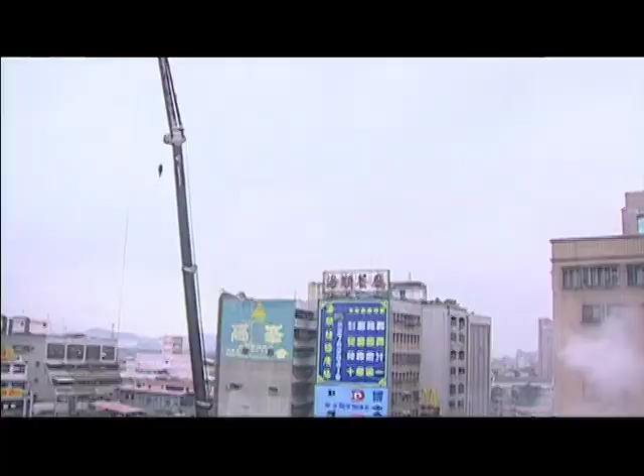Taiwan is under attack. Unpredictable forces of nature threaten the ambitions of this Asian economic giant. To fight back, the island's best minds race to deliver innovative ideas: high-tech factories that manufacture ultra-safe building blocks and assemble them ultra-fast.

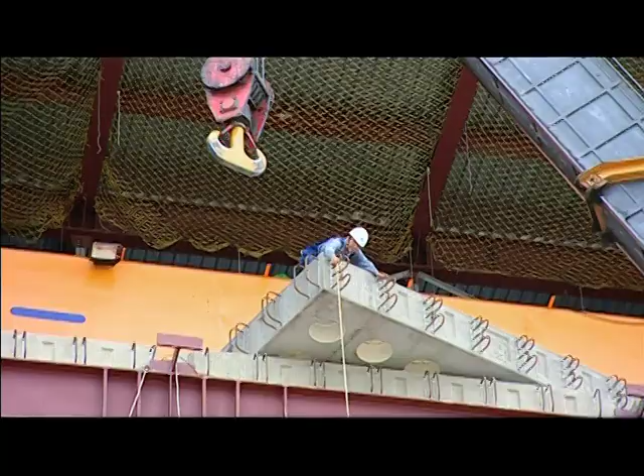Now, Taiwan's unconventional construction method faces its ultimate test: how to prefabricate buildings of all shapes and sizes - a billion-dollar high-tech factory, a 22,000-seat stadium, and a towering 38-story residential block. Tempestuous weather, near impossible deadlines, and the constant threat of earthquakes combine to make the engineer's job even tougher. This is like Lego, but it's a million times harder and bigger. If they succeed, Taiwan's prefab magic will become a man-made marvel.

Taiwan, a mountainous island more than 30,000 square kilometers in size, is home to 23 million people. Rapid industrialization in the late 20th century transformed it into an Asian economic giant. Its foreign reserves are now among the world's largest. But Taiwan's growing economy is vulnerable.

The island is continually attacked by one of nature's most destructive forces: earthquakes. We have about 200 earthquakes of magnitude 5 every year. And then perhaps we have earthquakes of magnitude 6 about every 3 or 4 years.

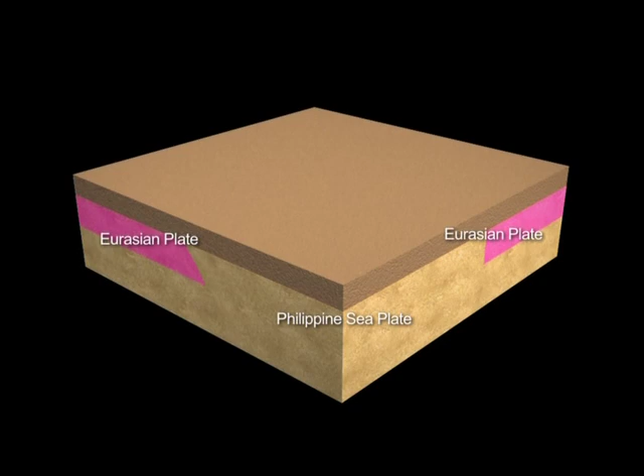Taiwan's geological instability is due to its position on the Earth's crust. It sits precariously on the fault line between the Eurasian and the Philippine Sea plates. Constant movement between these two creates powerful shock waves, producing the many earthquakes experienced by Taiwan, dangerously exposing its densely populated cities to potential devastation.

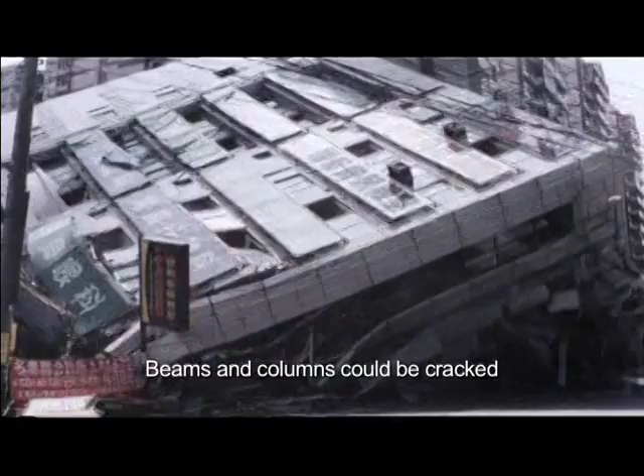Many buildings may not be sufficiently strong enough to resist the earthquake force. Beams and columns could be cracked, and even more seriously, buildings could collapse, causing loss of lives.

September 21st, 1999: Taiwan's worst nightmare came true. A massive earthquake, more than 7 on the Richter scale, strikes the small town of Chi-Chi. It's so powerful that it even rocks Taipei. In the end, more than 2,000 people lose their lives. The disaster, named the Chi-Chi earthquake, cost Taiwan around $9 billion in infrastructure damage.

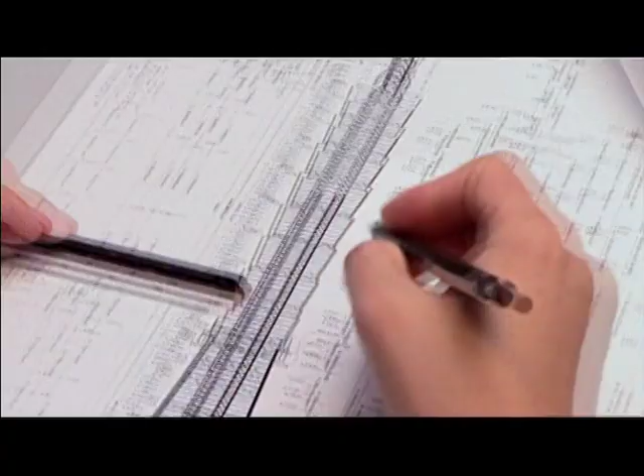Coming up with stronger building methods is now Taiwan's immediate priority. Government agencies and universities begin exploring innovative ideas to strengthen Taiwan's buildings. Multi-million-dollar city icons like Taipei 101 spare no expense to arm themselves with state-of-the-art anti-earthquake devices.

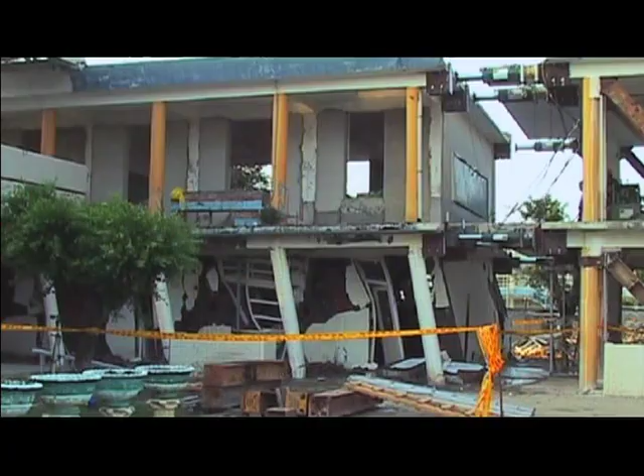Dr. Yin is quick to identify the source of a building's vulnerability when facing an earthquake: it's columns and beams. An earthquake attacks them with its powerful lateral movements, violently bending their steel skeletons and causing the concrete bodies to shatter inside and out. As soon as they collapse, the building they hold up is as good as finished.

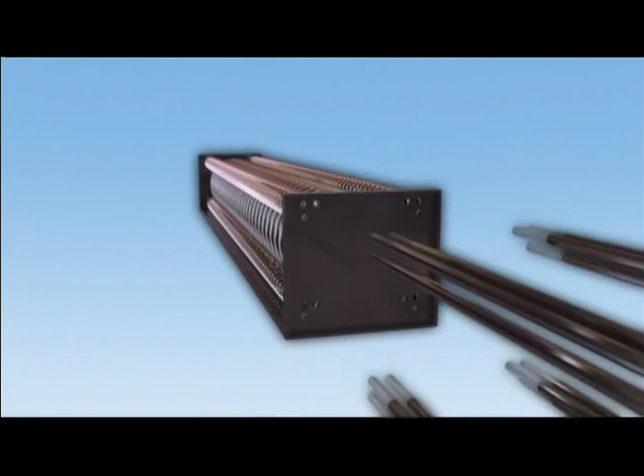Dr. Yin's solution is to replace the squarish shape of a standard beam or column steel skeleton with a unique circular design. He calls it the Yin spiral. The Yin spiral is twice as stiff to keep its shape during the fiercest quakes. It can also dissipate energy more evenly to keep the concrete around it intact, preventing the building it supports from collapsing.

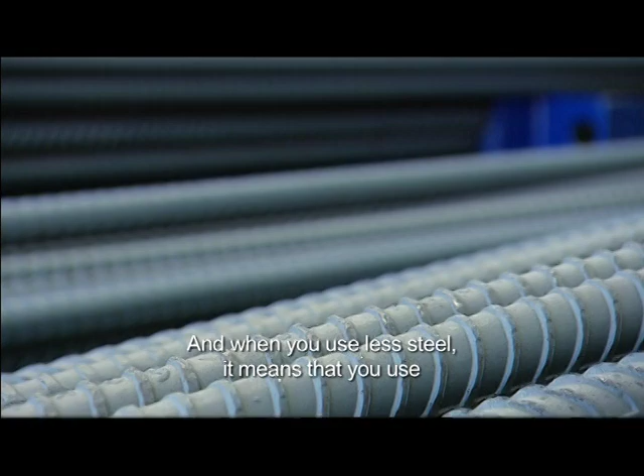But turning Dr. Yin's unique design into a reality is easier said than done. Construction normally takes place on-site, exposed to erratic weather conditions, and prone to human error.

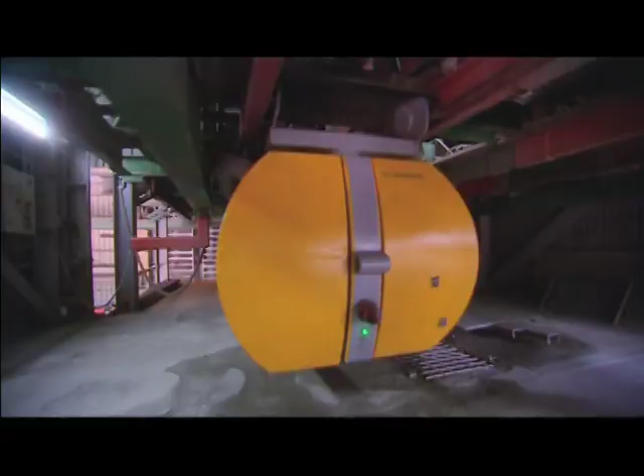Dr. Yin turns to the magic of prefabrication, or prefab construction, for a faster and more accurate alternative. Unlike traditional construction, prefab takes place indoors where the climate is controlled, making the work super fast and hyper efficient. The finished building blocks are then assembled rapidly on location. It's like putting together a mega Lego set on steroids.

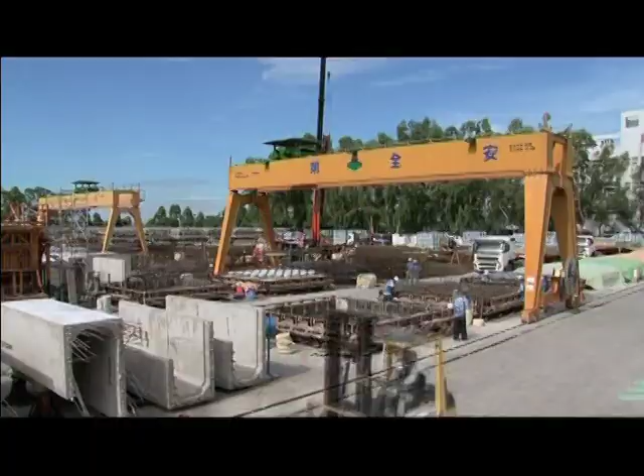Convinced he's found the perfect method, Dr. Yin builds Taiwan's largest and most advanced prefab plant - 10 soccer fields in size, so efficient it can churn out 100,000 cubic meters of concrete blocks in a single year.

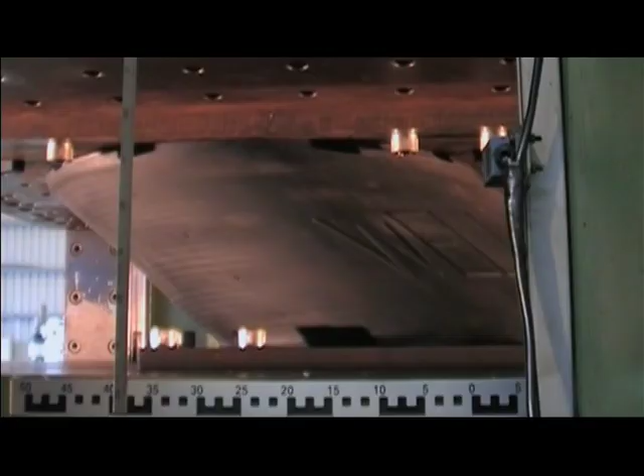The plant's biggest challenge: to customize their prefab process for buildings of totally different shapes and sizes - a billion-dollar high-tech factory, a 22,000-seat stadium, and a towering 38-story luxury residential block. Tough deadlines, the unforgiving Taiwanese terrain, and the threat of typhoons will take engineers to breaking point. Will success seal their reputation as Taiwan's genius builder?

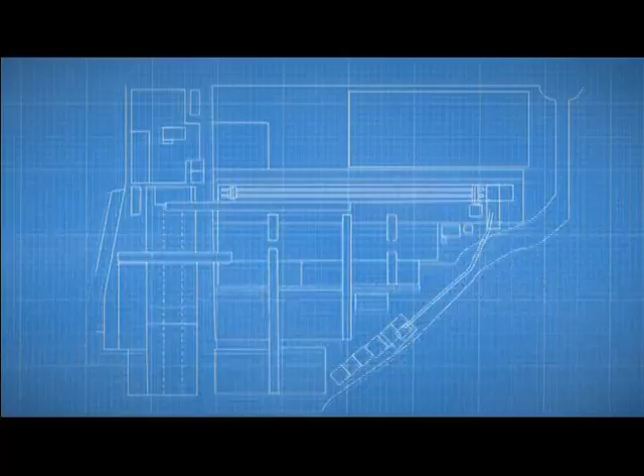The secret to this factory lies in its finely tuned 3-stage process: the steel shop, where high-grade steel is cut and bent into shape; the assembly line, where the steel skeletons of prefab building blocks are put together; and a concrete casting and molding facility, where the mega building blocks get their final shape, ready for delivery. Operational efficiency is crucial.

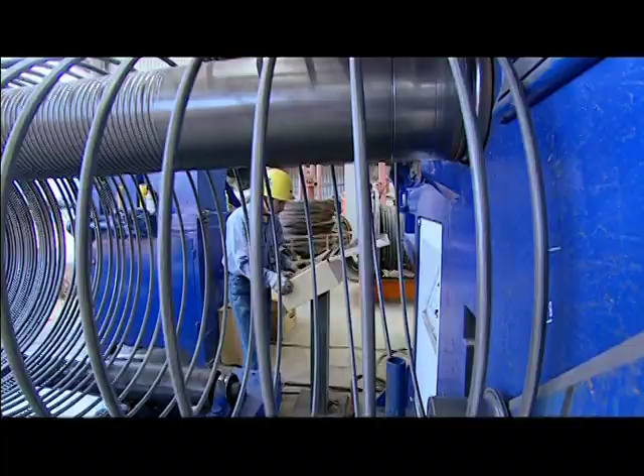It's the ingenious machines that give production an edge. Giant spring manufacturing equipment churns out unique steel spirals that form the skeleton of columns and beams, an eco-friendly process that reduces the demand for raw steel by 30%.

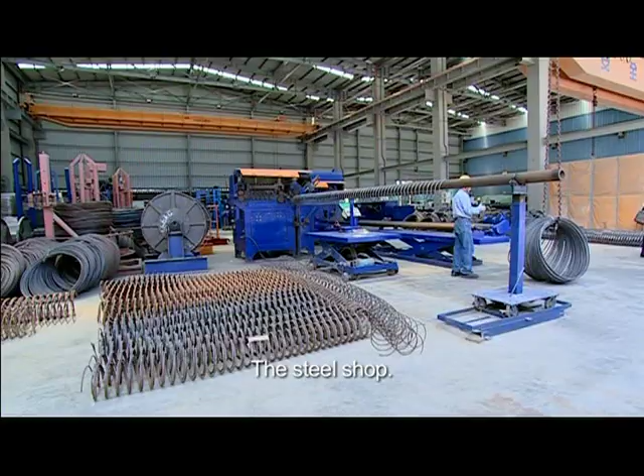The factory is geared up for the challenge ahead. Time now to turn theory into practice. Are they up to the task, to prefab 3 massive buildings of different sizes and shapes in record time?

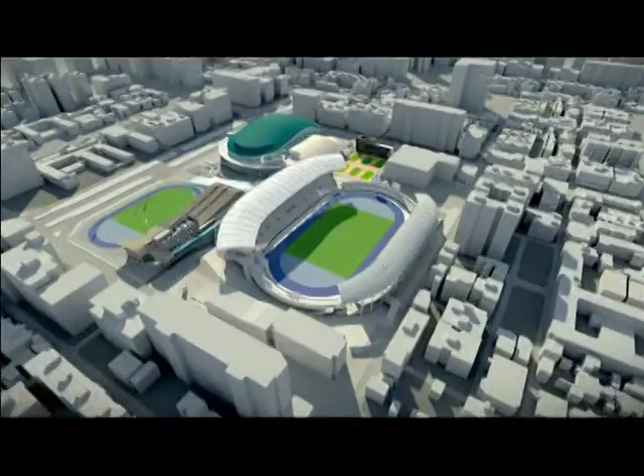The Taipei Stadium, the 38-story Ocean Blue condominium, and the largest of all, the 600,000 square meter Innolux plant.

Innolux is a homegrown liquid crystal display manufacturer in Taiwan's rapidly growing IT industry. The billion-dollar business is one of Taiwan's most important exports. For companies like Innolux to stay competitive, they require high-tech factories to assemble their sophisticated products. The faster they get their factory built, the earlier they can generate income.

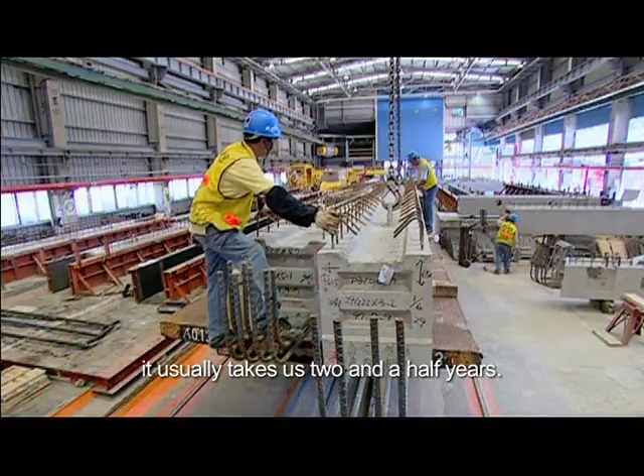In the conventional way, if we want to build such a big project, we usually take 2.5 years. Now we only take 1 year.

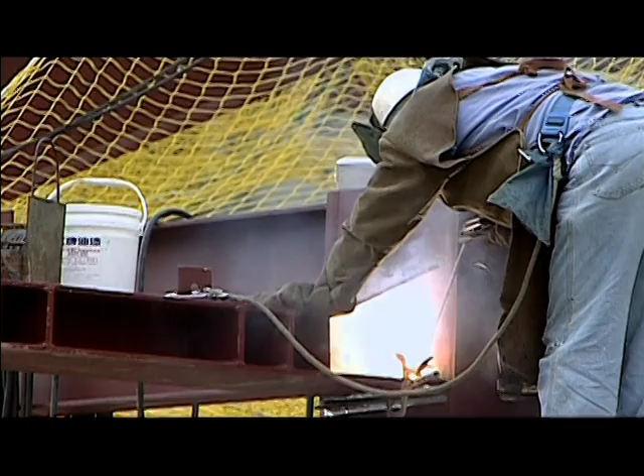Work starts on the plant's massive foundation. Engineers excavate a gigantic area measuring 100,000 square meters. Thousands of tons of steel piles are welded together to form the building's 6-story framework.

But these are the easy parts. The biggest challenge is to tailor-make the floors of the plant's largest cleanroom facility. Cleanrooms are the most important part of the factory. They prevent environmental pollutants like dust or microbes from ruining the microchips that Innolux manufactures.

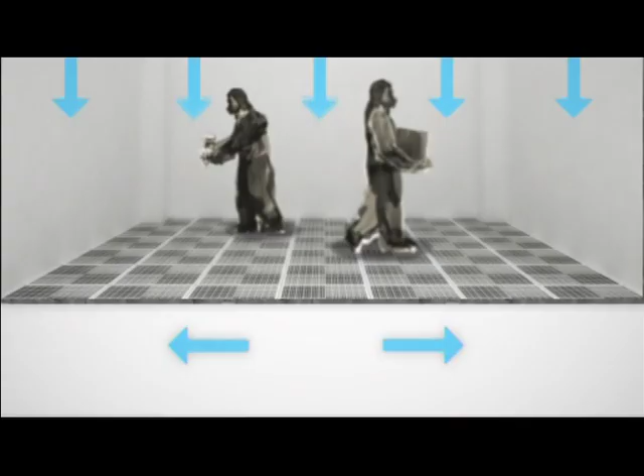Inside, a filtering system controls air contamination levels through multiple ventilation points built into the floor. This means that cleanroom floors are riddled with large holes. So how do you construct a giant floor filled with hundreds of holes while making it earthquake-proof?

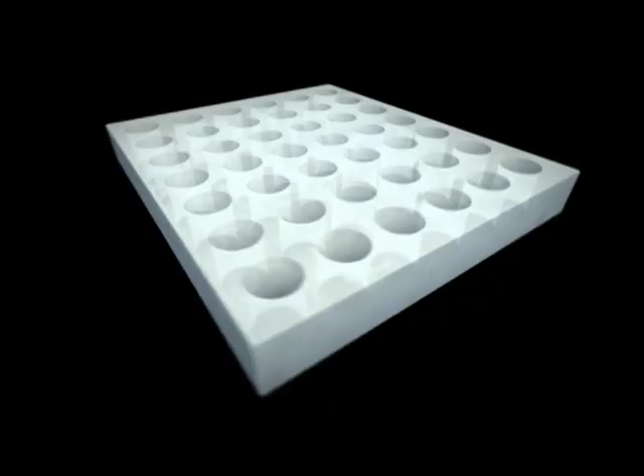The engineer's plan is to split the cleanroom's 48,000 square meters of flooring into 1,800 smaller sections, making them easier to prefabricate. Then, to strengthen each piece, they will double the amount of steel and concrete.

At the same time, a massive net of steel will form the frame of the floor, holding the pieces together. In this way, the customized floor is strong and stable enough to withstand the most violent quakes.

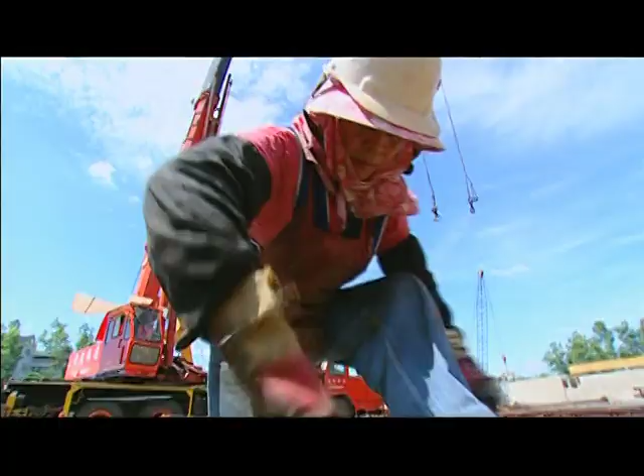With the perfect plan in place, the prefab factory now needs to build the perfect floor. First, a crack force of craftsmen binds the steel skeleton of each floor slab together. The work is fast-paced and done entirely by hand.

Then we have the skeleton put inside of the mold. Here is the mold - you can see it has all these grooves, and then all the skeleton of our concrete slab will be fixed into the right location.

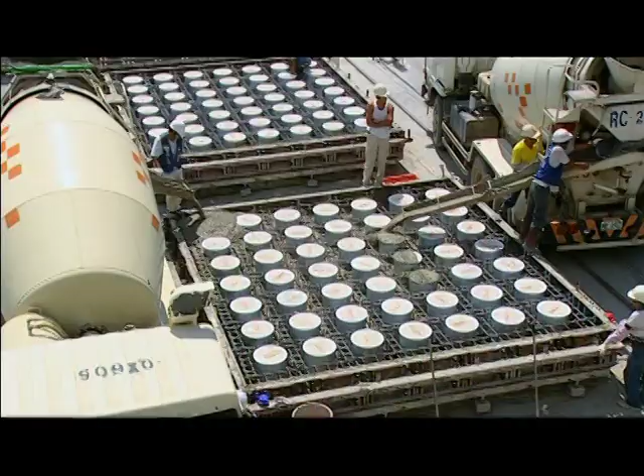After the skeleton is inside, we put the bucket inside here, and then we cast the concrete. As the concrete is poured into the mold, the plastic buckets help to form the shape of the vital ventilation holes. With just 22 molds, the factory is able to prefab all 1,800 floor pieces in less than 3 months.

Because we have to insert all these tubes to get the ventilation, it looks like a cheese, so we call it a cheese slab.

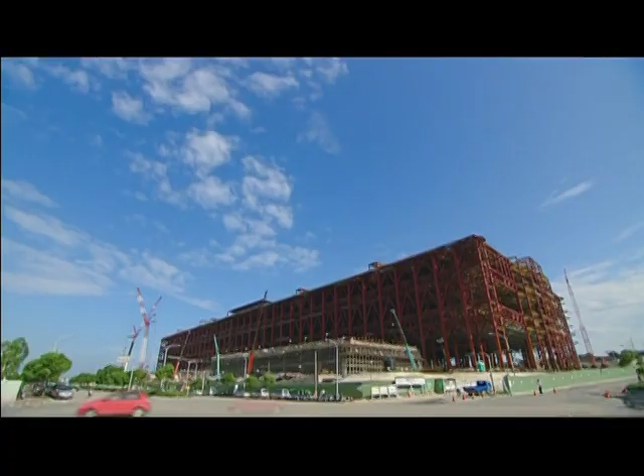The last stage of the process is to install each of the 25-ton floor slabs - not on the ground floor, but 4 stories up. For engineers, it's the most dangerous part of the construction.

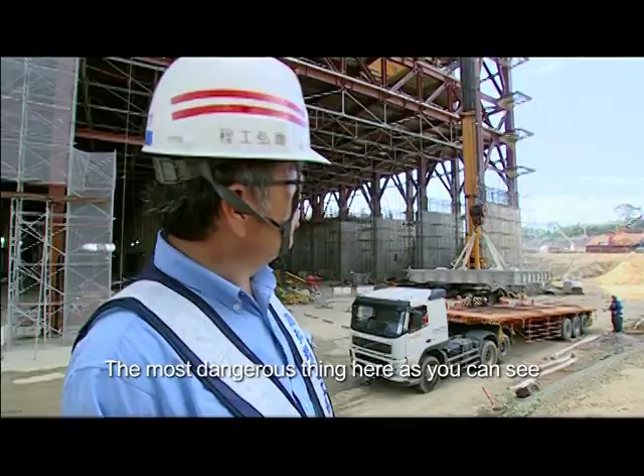The most dangerous thing is, for this 25-ton slab, we have to lift it up to about 30 meters height and insert it into about a 10-meter narrow gap.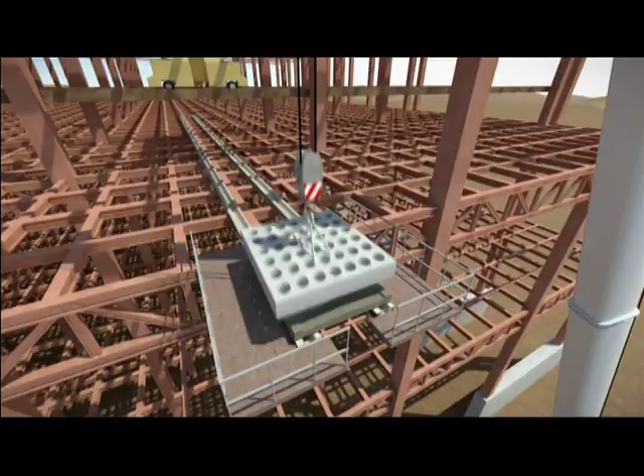For a job like this, you need a heavy lifter - a 120-ton crane capable of hoisting these giant blocks into place. A crew at the top slides and drops the massive sections into the steel framework.

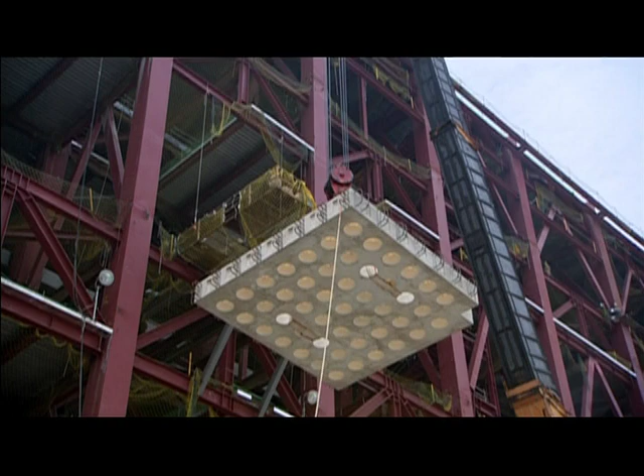You can see, now it's up to the right floor, and we have to get that one into that one. The most dangerous part is inserting the slab. If it doesn't make properly, then we have a big problem. This is a big disaster.

After a harrowing half an hour, and with only inches to spare, the slab rests safely at the top and is moved into position.

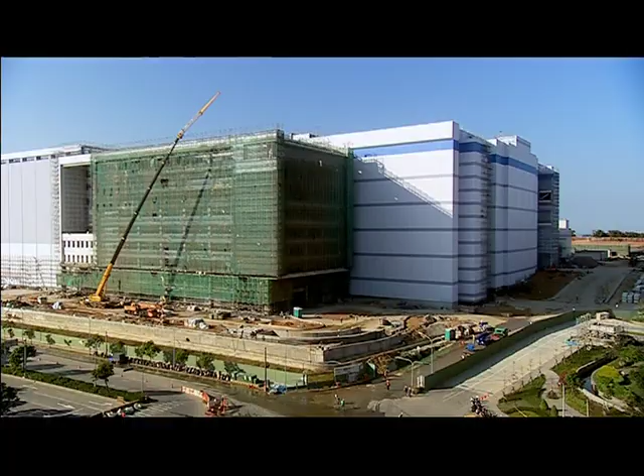Over 10 months, engineers install thousands more floor slabs and put the finishing touches to the factory. Completion of the project is at last a success.

This is an exciting experience for me because we had to finish this big project in such a short time, and the precast helped us to accomplish this mission.

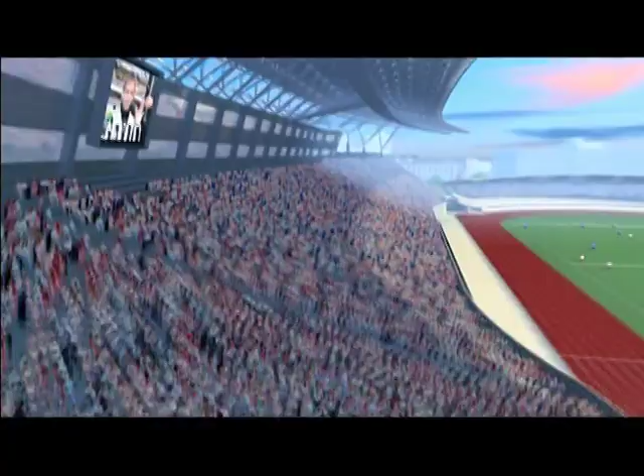With the Innolux plant completed, engineers turn their attention to another mega project, the $70 million Taipei Stadium. It usually takes over 30 months to build a stadium this size. But engineers are going to use prefab to shave more than 5 months off the schedule. If they succeed, it will be the fastest stadium ever built in Taiwan. Only one problem.

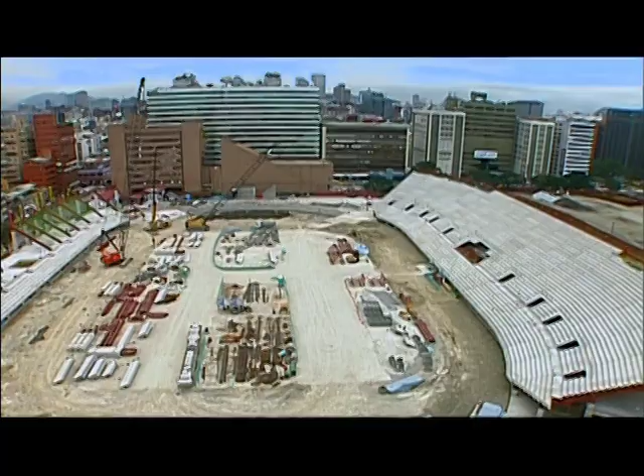The city of Taipei sits on some of the softest soil on the island, a condition made worse by an extremely high water table that rises during the annual typhoon season. If engineers want to get the stadium ready in time, they will have to prevent it from sinking into the ground.

Homegrown innovation has been the powerhouse that's propelled Taiwan into the future.

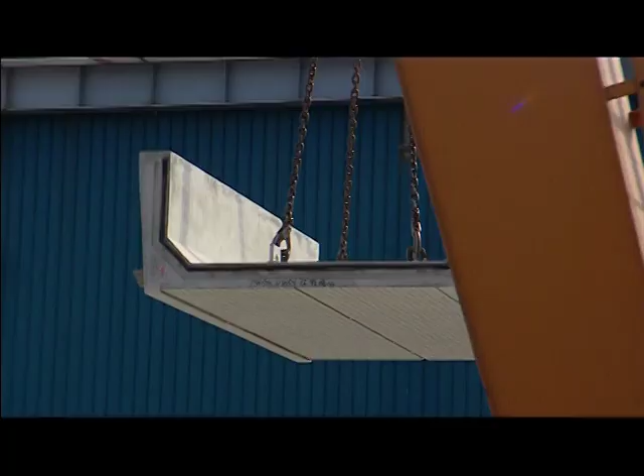The island's largest prefabrication factory is attempting its most ambitious projects to date, constructing 3 mega buildings in record times. Engineers took just 1 year to complete the massive 600,000 square meter Innolux plant. Now they turn their attention to their next 2 missions.

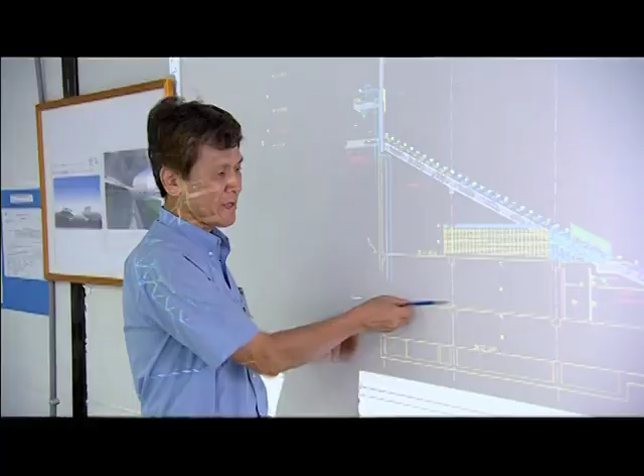The 38-story Ocean Blue condominium and the 22,000-seat Taipei Stadium. Commissioned specially for the 2009 Deaflympics, the stadium has to be ready in less than 25 months. It usually takes more than 30 months to complete something this big. If engineers succeed, they will make construction history.

Engineer Zhang leads the project.

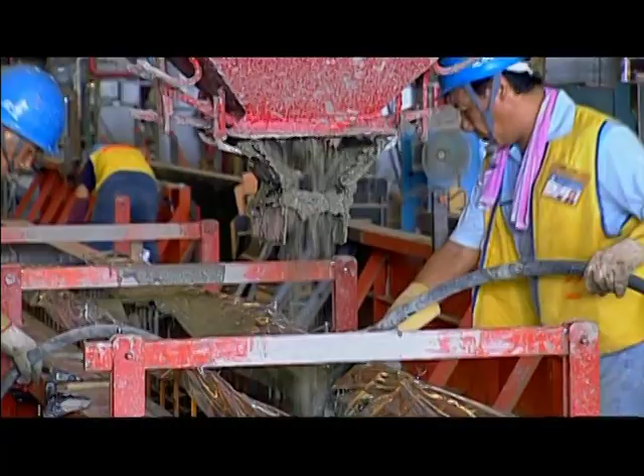Back at the prefab factory, engineers customize the stadium's 900 seating slabs. Specially designed molds of different sizes and shapes churn out the 15-centimeter thick parts. This way, 16 seating slabs can be completed in a single day, a feat conventional methods will find hard to beat.

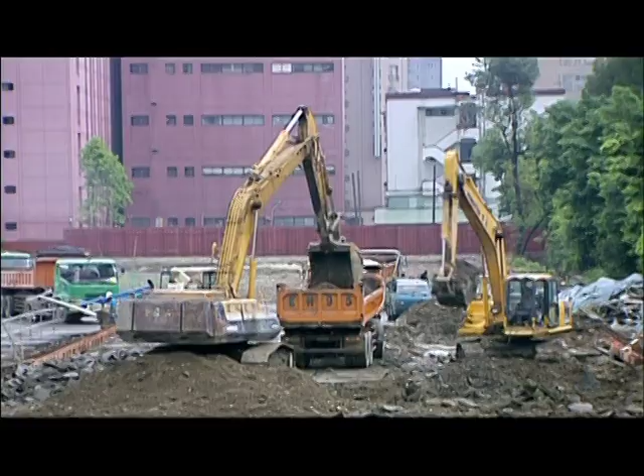But first, engineers have to overcome a sticky problem that could ruin their foundation: soft clay.

This unstable soil underlies Taipei because the city sits on a basin. And as the basin is intersected by 4 rivers, the soil also suffers from a high water table, just 2 meters beneath the surface.

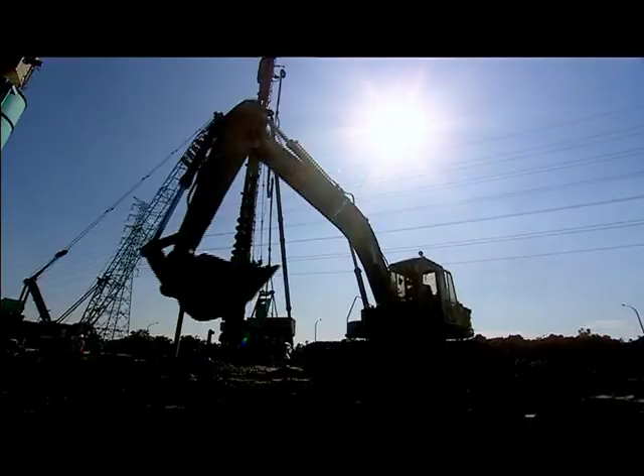Complicating the problem even further is the threat posed by the engineer's deadliest foe: earthquakes.

Because the city of Taipei has a thick layer of soft soil, when an earthquake comes, the earthquake wave will pass through this thick layer of soft soil, and some of the earthquake waves will be amplified. Therefore, the building built on this layer of soil could suffer serious vibrations.

For engineers to complete the stadium in time, they need a solution that will both stabilize their soft foundation and counter the threat of an earthquake.

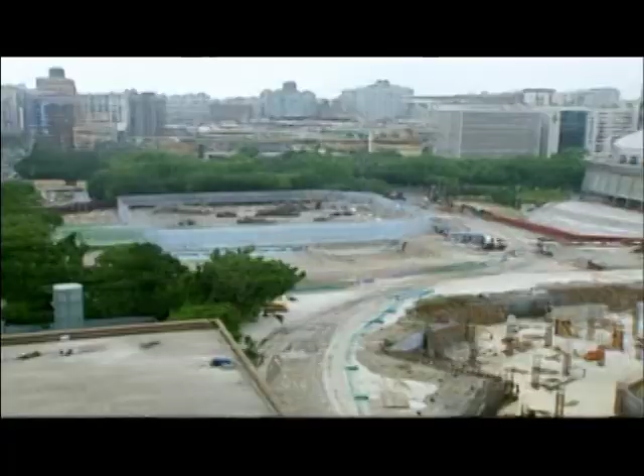Prefabrication can't help engineers in this situation. They need to come up with an alternative solution.

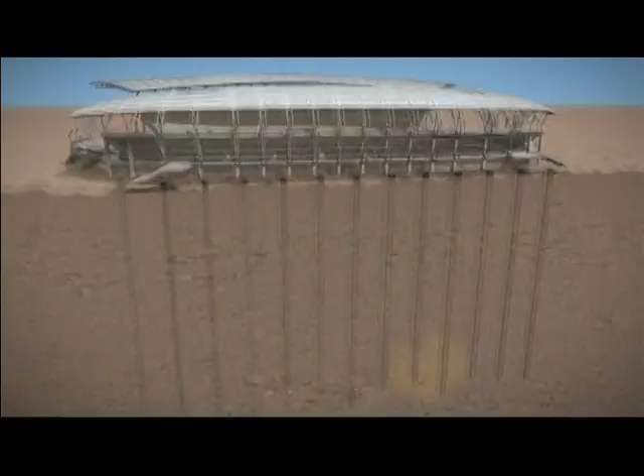One option is to drill steel foundation piles deep into the earth. But it's a time-consuming process, and the amount of steel needed makes it an expensive scheme. What's worse, an earthquake or a hidden pocket of clay could destabilize the steel piles, causing part of the stadium to collapse.

Engineers turn to a conventional but highly effective technique to tackle both problems: mat foundations.

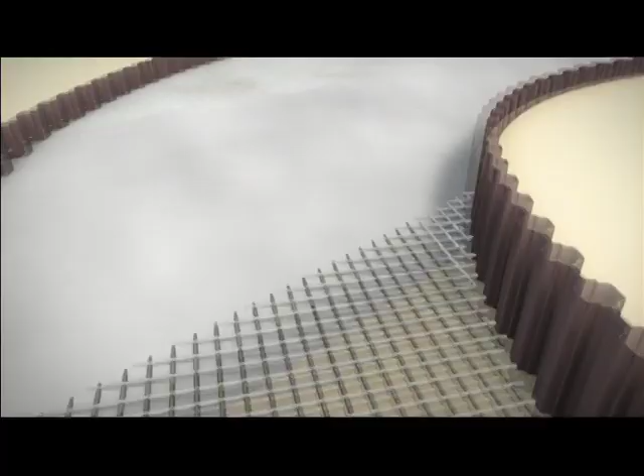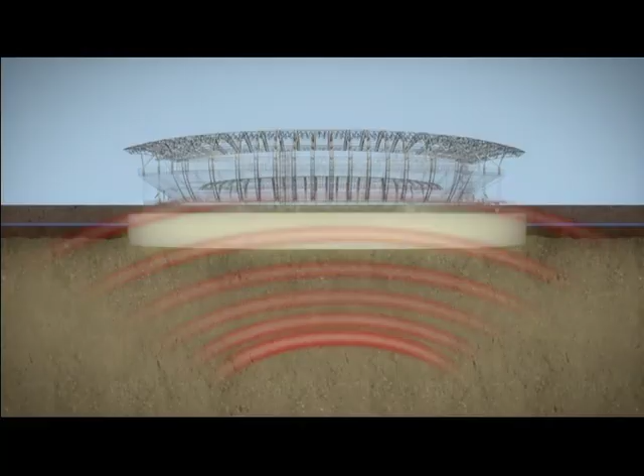Engineers will excavate close to 5 meters down until they hit sand, a stronger and heavier material than clay. Then they'll place a bed of steel onto the sand, reinforced with concrete, creating a mat foundation. By building countless mat foundations around the 600-meter circumference of the stadium, the weight of the structure is distributed evenly across and under the site, allowing it to sit undisturbed within the soft clay and high water table. Even if an earthquake hits, the stadium will move as one in the soft soil, just like a ship floating at sea.

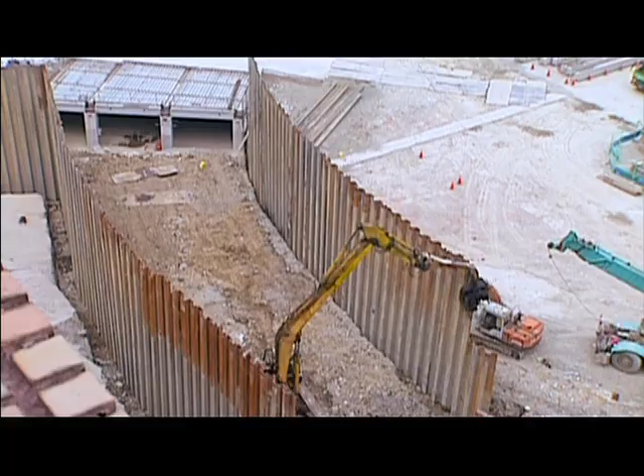Work begins. First, engineers construct a series of waterproof steel structures called cofferdams. These temporary structures surround the worksite with a wall of steel sheet piles, making it safe to work inside. Then they assemble the steel skeleton of the mat foundation. Workers pour tons upon tons of fast-setting concrete to give the foundation its final shape.

But before engineers can finish their work, disaster strikes. The annual typhoon season hits Taipei. A Category 2 typhoon makes landfall east of the city, causing flash floods and landslides, clocking wind speeds of more than 180 kilometers per hour. At the stadium, almost all the cofferdams are inundated with rain. It's a major setback for the crew.

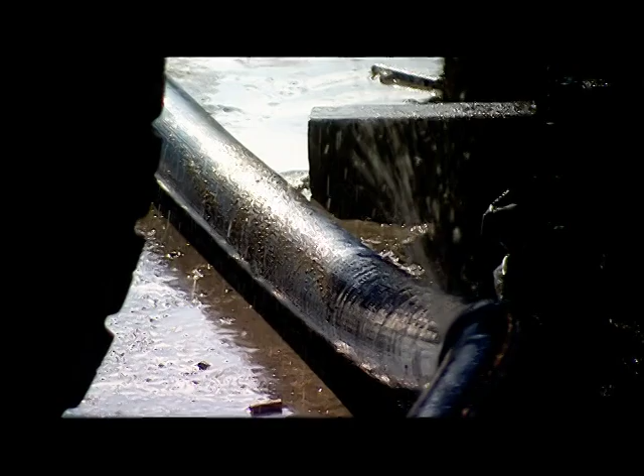Engineers work non-stop to come up with the most efficient salvage plan. They use every pump at their disposal to discharge the water from the cofferdams.

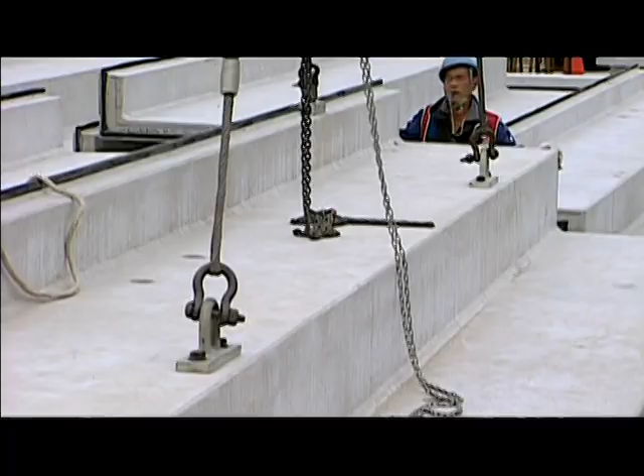Engineers overcome the potential disaster. Now they begin to assemble the rest of the structure at breakneck speed. The stadium's 900 seating slabs go into position in just 2 months. 3 men and a crane are all it takes to get the job done. And after bolting its massive roof trusses into place, Taipei Stadium begins to take its final shape.

Engineers have successfully met their tight deadline.

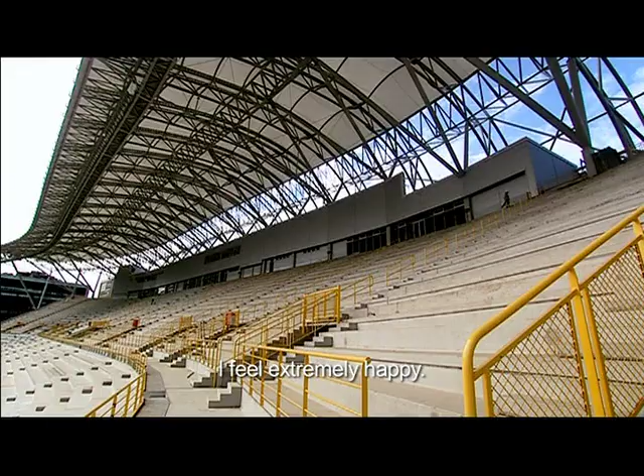With the stadium complete, the prefab factory begins work on another giant project: a towering luxury condominium called Ocean Blue. At 38 stories, Ocean Blue will be the tallest prefab building in Taiwan, constructed in less than 2 years.

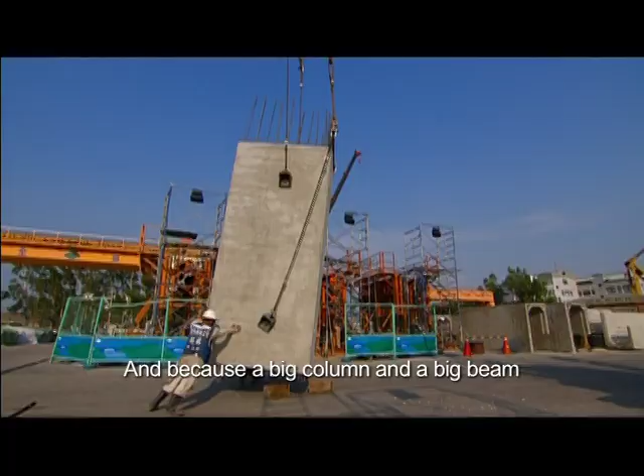Almost immediately, engineers face a major challenge. To make such a tall building earthquake-proof, they will have to build structural supports of near impossible dimensions. If we use a conventional method, it definitely you will have a big column and a big beam. That will cost a lot of money, and because a big column and a big beam will occupy a lot of space, it's not good for a residential building.

Engineers need to bring on state-of-the-art anti-earthquake technology and the magic of prefabrication to create this residential paradise by the sea.

Behind the bustling, prosperous facade of one of Asia's economic powerhouses lurks a constant threat. Taiwan is at the mercy of one of nature's most powerful forces: earthquakes, some measuring more than 7 on the Richter scale.

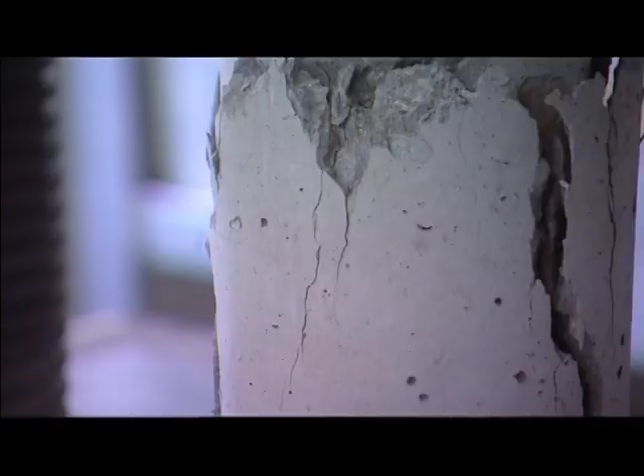To protect its people and its cities, Taiwan turns to advanced building technology. Prefabricated construction could be the answer.

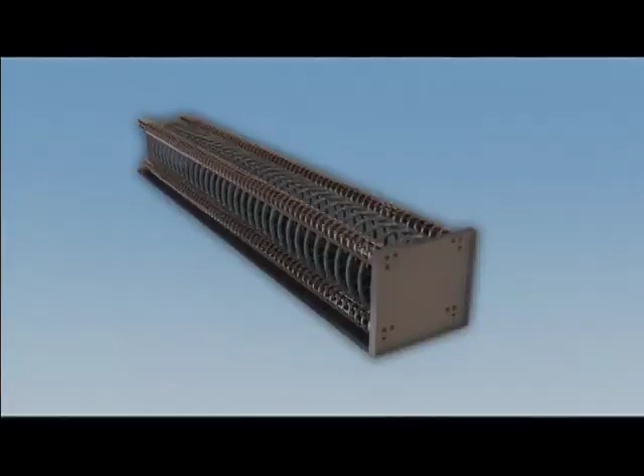A massive factory creates high-quality concrete building blocks with production line efficiency, and then assembles them rapidly on site. Armed with a super tough steel skeleton, these blocks are strong enough to withstand an earthquake.

Engineer Dr. Samuel Yin is proud of his achievements.

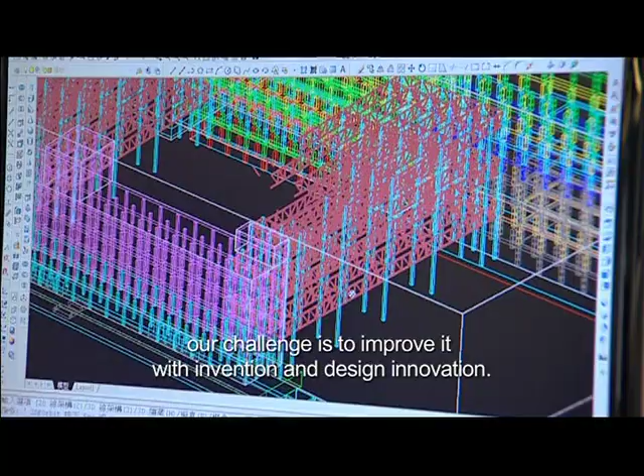Taiwan's largest prefab factory is now facing its biggest challenge to date: building one of the city's tallest residential blocks, the 38-story Ocean Blue condominium.

Engineers there are trying to overcome their first hurdle. As expected, the higher you go, the tougher it is to defend the building against earthquakes. To make Ocean Blue earthquake-proof, engineers will have to produce columns of impractical dimensions. They will be too expensive to produce and take up too much space in the structure. Engineers have to figure out a more practical solution. Because earthquake is the most critical issue in Taiwan, so we must build this structure earthquake-proof.

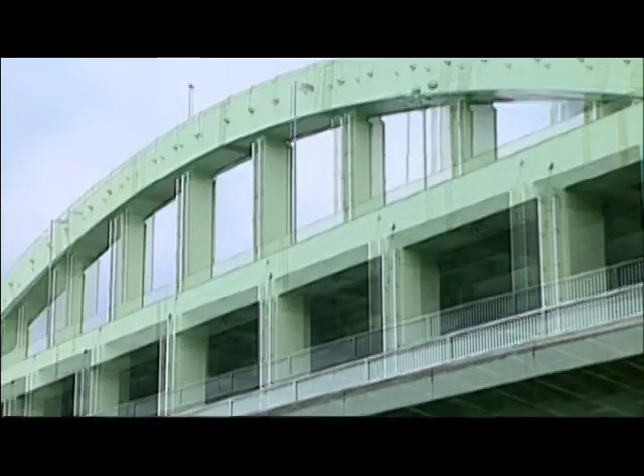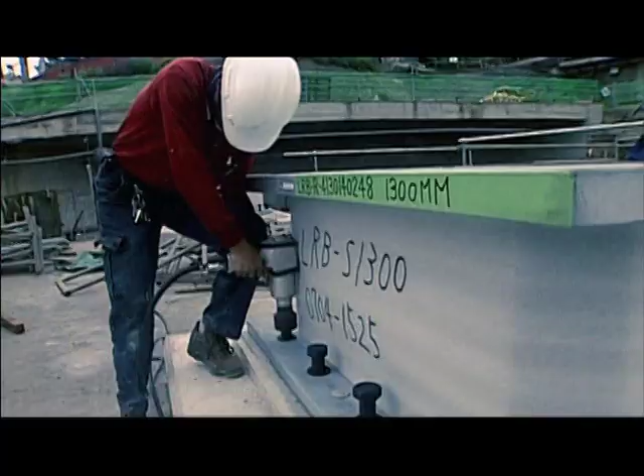Advanced bridge building technology may provide the key: via seismic isolators, invented by New Zealand scientist Dr. William Robinson in the 1970s. Seismic isolators are used in bridge construction to dissipate earthquake energy by up to 90%. Installing them under Ocean Blue could help minimize the size of its structural supports.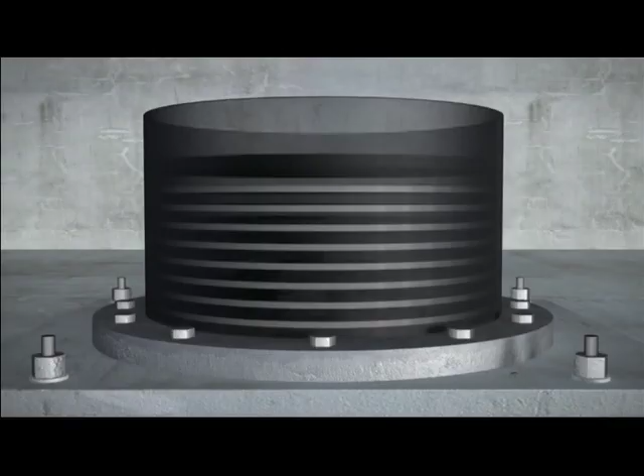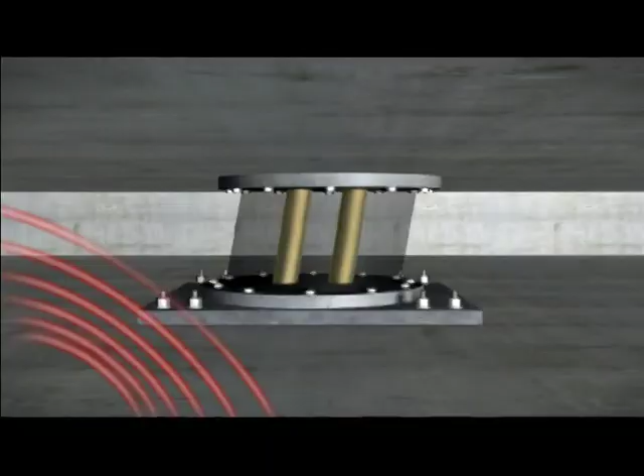The secret behind this incredible invention lies within each isolator. Inside, layer upon layer of elastic rubber is sandwiched between powerful steel plates. They serve two purposes: to form a padded compact block to support the pressure of a building above it, and to maintain the shape of cylinders made out of lead, which is both dense but flexible. When an earthquake hits, the lead bends and adjusts easily with its lateral forces without fracturing, absorbing the energy and distributing it away from the supports of a building.

It sounds like the perfect answer, but Ocean Blue engineers need to be sure. So they put the isolator through an earth-shattering test.

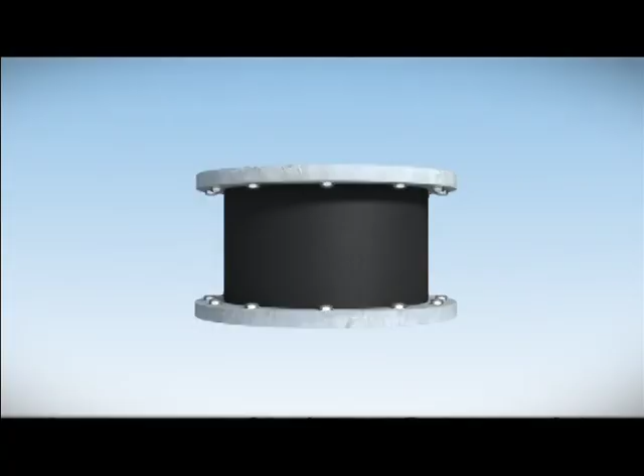Engineers plan to apply 140 tons of pressure to stress and strain the isolator laterally, adding another 1,200 tons of vertical force to simulate a section of the building's weight.

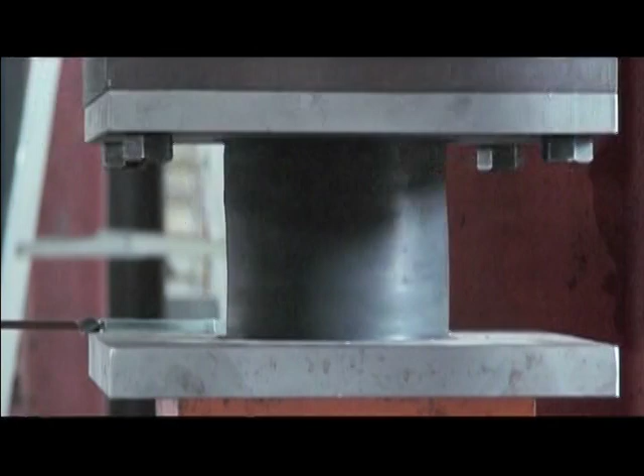The test begins. Hour after hour, earthquake forces of 7 Richter and more strain the isolator mercilessly.

A total of 43 isolators will support Ocean Blue, the largest measuring close to 2 meters in diameter. These are the biggest isolators ever used in Taiwan.

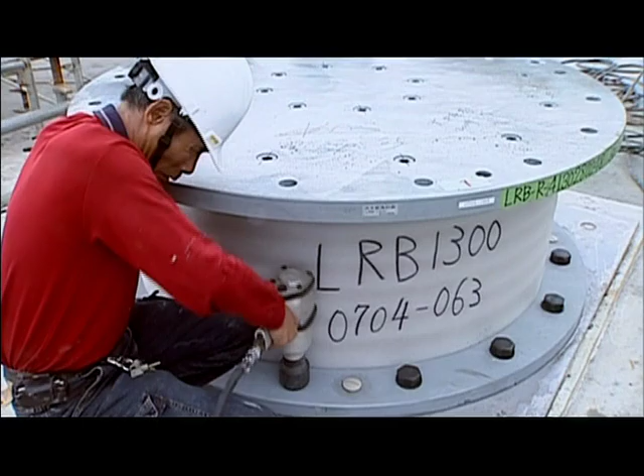After 2 months of careful construction and installation, the isolators are finally in place. This high-strength concrete column and this high-strength concrete base, and between these two structures, is isolated.

We are very happy we can complete it successfully.

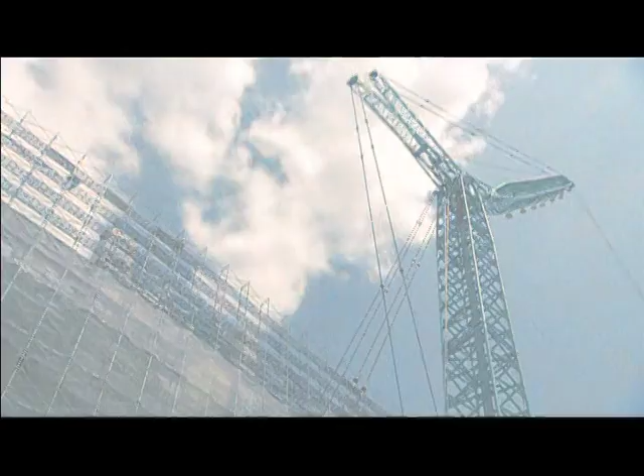With earthquake protection secured, engineers can now focus on prefabricating the rest of the structure. Conventional methods require 2 weeks to complete a floor, but with prefab, each floor can be assembled in a record 8 days.

But engineers cannot afford to be complacent. Ocean Blue is located on the coast of the Taiwan Straits, where gusts of wind can hit speeds of more than 20 meters per second, making construction a nightmare. If engineers are not careful, the hoisting operation could easily turn into a disaster zone.

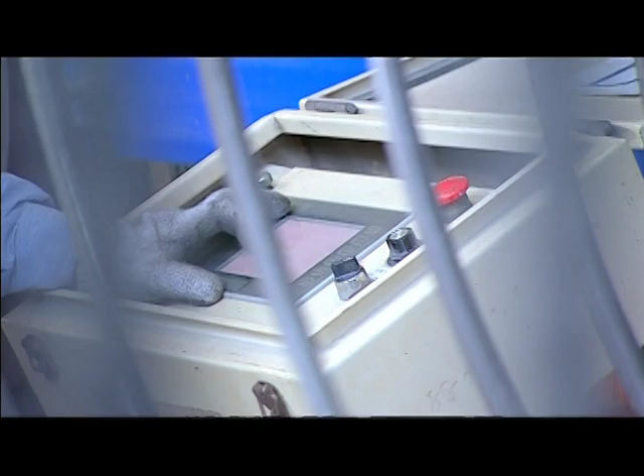Taiwan's destructive earthquakes have finally met their match. The island's largest prefabrication factory manufactures building blocks tough enough to protect structures from an earthquake.

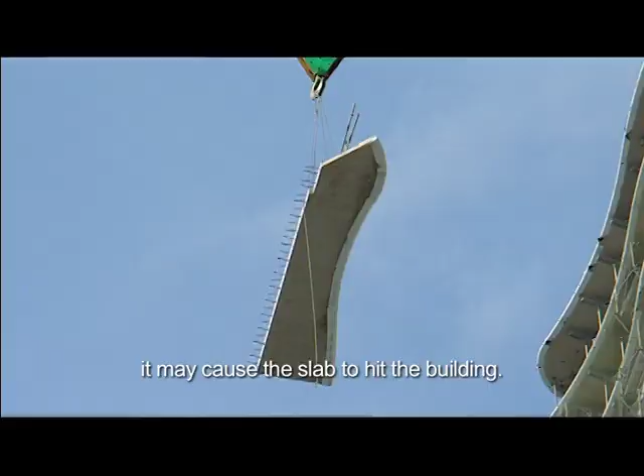One last floor remains to be assembled, level 38. Time for some serious lifting grunt. A 440-ton crane will hoist more than 60 balcony slabs and columns, some weighing almost 20 tons.

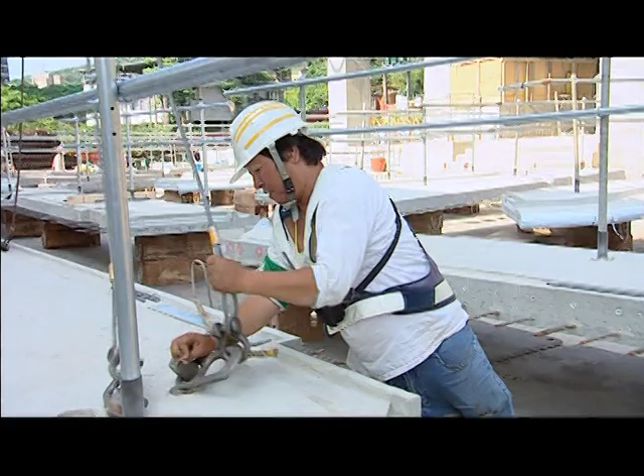It's fraught with danger, and engineers have only 5 hours to get it done. A single mistake or a strong gust of wind can throw the entire operation into chaos.

I'm a little bit nervous. We should be quite careful, because underneath there should be no people underneath the slab. If anything happens, it will cause big trouble.

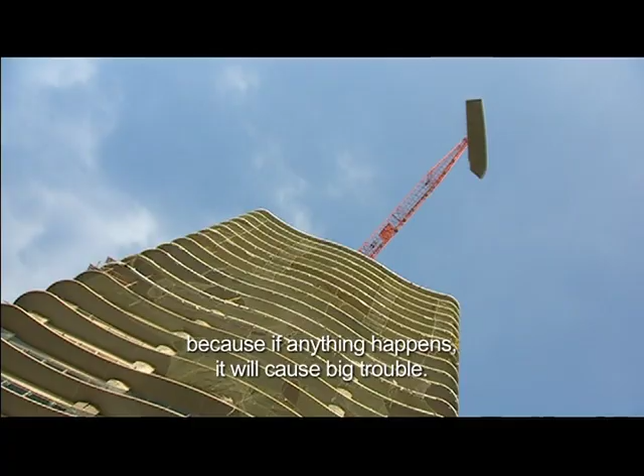Okay, you can see the slab almost go to the top. Okay, let's go.

On the top floor, a small army of workers assemble the balcony slabs, beams and columns with rapid precision. They know that the longer it takes, the bigger the chance of something going wrong.

This is like Lego, but it's a million times harder and bigger.

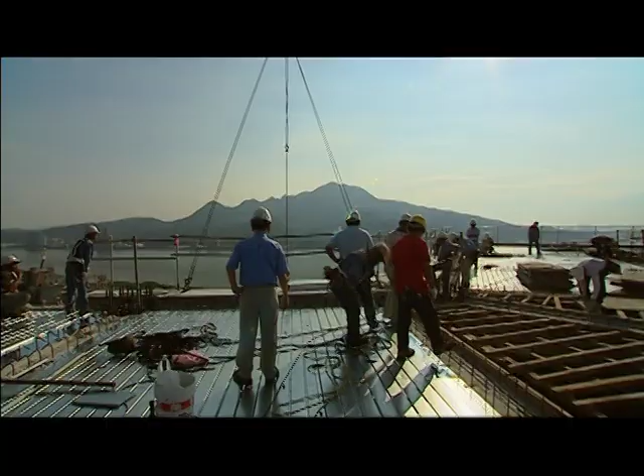As the 5-hour mark draws to a close, the last pieces of the floor finally make the climb and are welded into place.

With Ocean Blue now completed, Taiwan's largest prefab factory has achieved its goal of customizing its unique method for buildings of all shapes and sizes. Besides creating the towering 38-story luxury condominium, they've also constructed a billion-dollar high-tech factory and the 22,000-seat Taipei Stadium.

For the factory's creator, Dr. Samuel Yin, success has caught the attention of some of the world's top engineers.

In 2008, the Russian National Academy of Engineering awarded him their first Medal of Honor and elected him as an academician. Only 7 awards have been given out to date. Samuel receives the 8th from then Russian Prime Minister Viktor Zubkov.